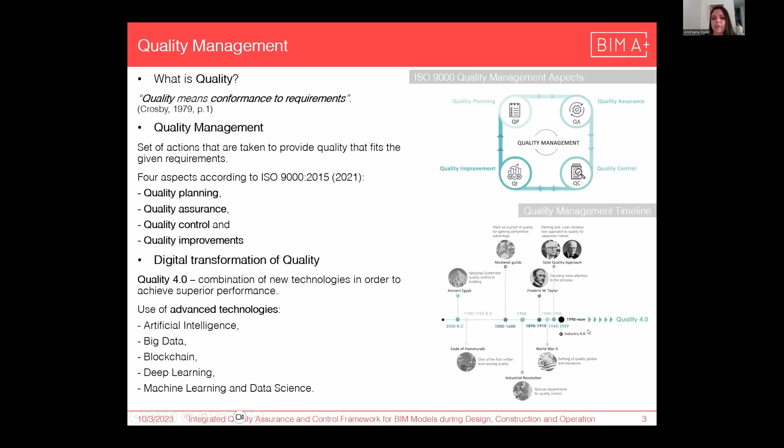Now, to actually delve into the topic of quality assurance and quality control in BIM, it is important to understand what is quality. And the most universal definition would be that quality means conformance to the requirements. Now, the need for quality actually inaugurated the discipline called quality management. The common misconception is that quality management started with the Industrial Revolution. The truth is it actually evolved along with the changes of products and services, which leads us to the main question: how to address quality in the digital environment.

Now, when it comes to quality assurance and quality control in BIM, they're often mistaken for the same. However, they represent two concurrent processes where QA is providing confidence that the quality requirements will be fulfilled, whereas quality control is using different verification methods and focused on fulfilling those requirements.

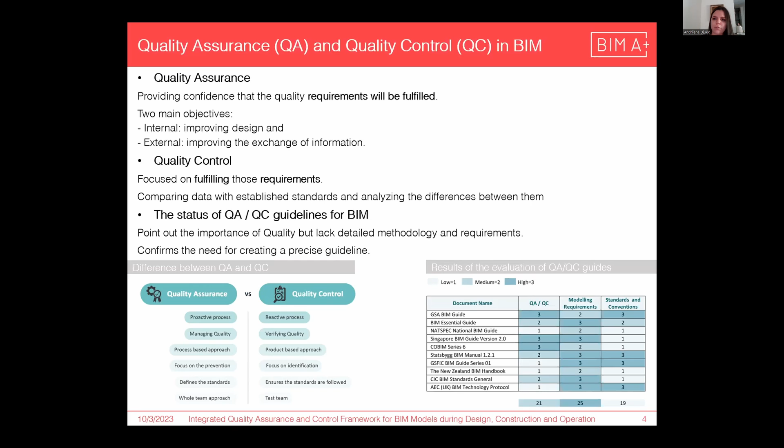Now, to address the current QA/QC status in the BIM market, a research study was conducted, basically by evaluating several guides and manuals, and here we can see the results. The results of this study showed us that all of them address quality to a certain aspect, but they lack detailed and precise guidelines, which also confirms the need for creating thorough requirements for assuring quality of the model.

Now, one very important aspect are information requirements and level of information. For a long time, we had the use of level of detail and level of development, and it caused a lot of misunderstandings. Even now, for each of us, LOD 300 for the BIM would be different. To overcome those limitations, level of information need was introduced.

And level of information need is based on the prerequisites, as we can see in this illustration. So it is important to answer: what is the BIM model use, so why the information is needed? What is the project milestone, so when the information is needed? Who is the actor? And what is the object?

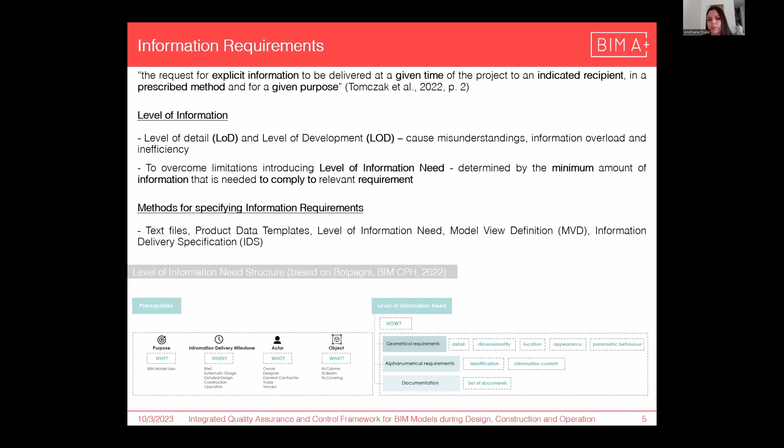Now, when it comes to methods for specifying information requirements, as we can see here, we have more than a few, and they go from the simplest, which is a text file, to something that is now gaining popularity, which is information delivery specification, otherwise known as IDS.

Basically, the proposed methodology integrates quality assurance and quality control: quality assurance through creation of a requirement specificator and quality control through the model verification process. So the proposal is to have a base called requirement specificator, from which the appointing party creates a subset of project-specific requirements. Those requirements are then handed to the appointed party, which creates the model based on them, subsequently exports the IFC file, then returns that IFC file to the appointing party, which then verifies compliance of the IFC file to the requirements.

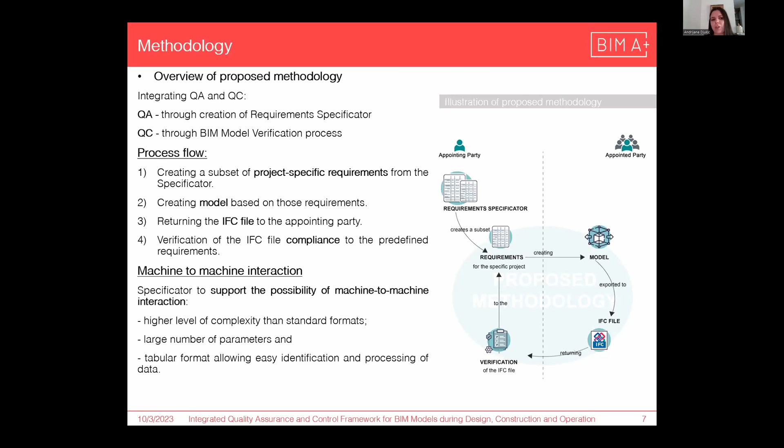An important aspect that was also addressed during the creation was the possibility of machine-to-machine interaction. As we will see later, the requirements specificator has a much higher level of complexity compared to what is conventionally used. It encompasses a large number of parameters, sorted in a tabular format, which would allow advanced tools to process that information. Now, this was tested on a case study in collaboration.

Now, the requirement specificator was a result of extensive research: a lot of interviews conducted with the company, a lot of tools evaluated, as well as guidelines. The specificator follows a class hierarchy inheritance, meaning that lower tiers inherit functionalities from the upper ones. As we can see, it consists of 3 tiers. It goes from the more general, which addresses fundamental requirements important for effective collaboration, so georeferencing, consistency of units, and so on.

Then we go to the second tier, which is more detailed, so it addresses modeling requirements, alphanumerical, geometrical, design specific, and model content, architectural, structural, MEP. And we have a finer division according to project stages. In this case, it was decided to have 3: design, construction, and operation.

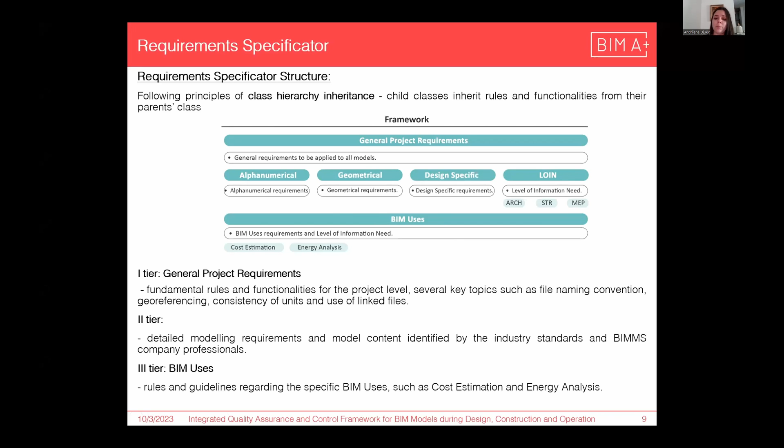And the third tier is structured the same as the second, so it addresses requirements and content, but it is focused on specific BIM uses, in this case, cost estimation and energy analysis. Now here we can see modeling requirements; they all follow the same rule schema.

So shall is expressing a requirement that must be followed, should and may something that is a recommendation, and can something that is a possibility. As we can see in this example, they can be used in a combination to address one requirement.

So here in BIM file naming, we know that all files must follow uniform and consistent naming convention. And then we have an ISO naming standard that the client can choose to follow. And the majority of requirements consist of these guidelines that are either proposed by ISO standards or by company professionals and their experience.

Now, when it comes to model content, it is addressed through level of information need. As already mentioned, it is in tabular configuration. And each parameter consists of description, data type, and corresponding unit.

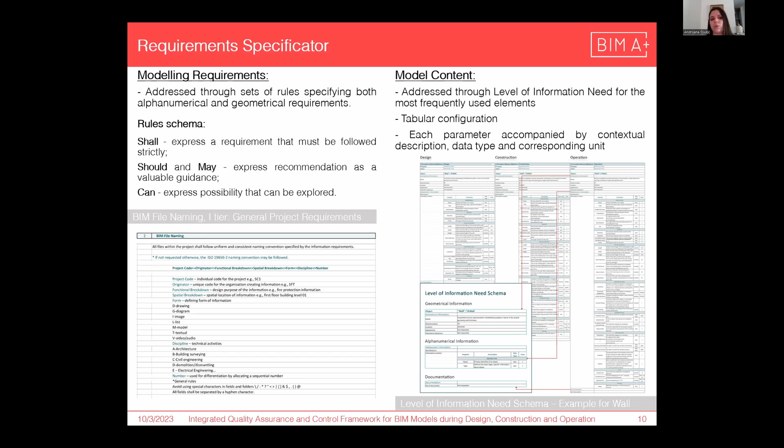Now, in this example of the wall, we can see that quantity of information with each phase grows exponentially. And it is important to know that not only the number of parameters changes, but it also becomes more specific. So if we in design phase have something that is estimated reinforcement, in construction and operation, it will become an actual calculated value.

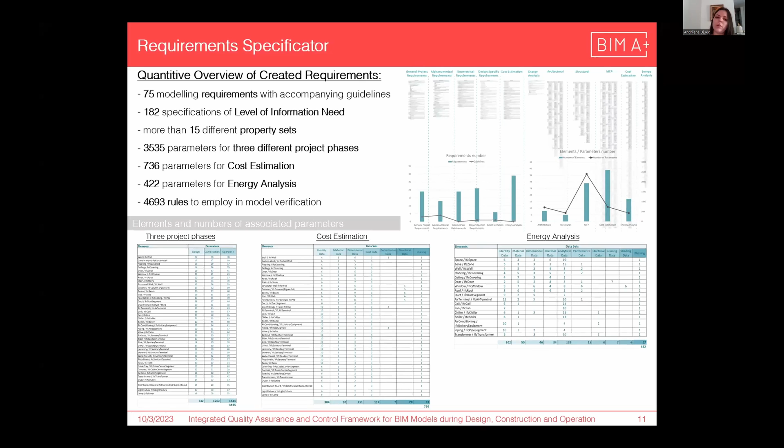And now here we have a quantitative overview of created requirements. Here we can see the requirements and their accompanying guidelines, as well as the elements and accompanying number of parameters. But overall, 75 modeling requirements, 182 level of information need, and overall, at this stage, 4,693 rules that can actually be employed in the verification process.

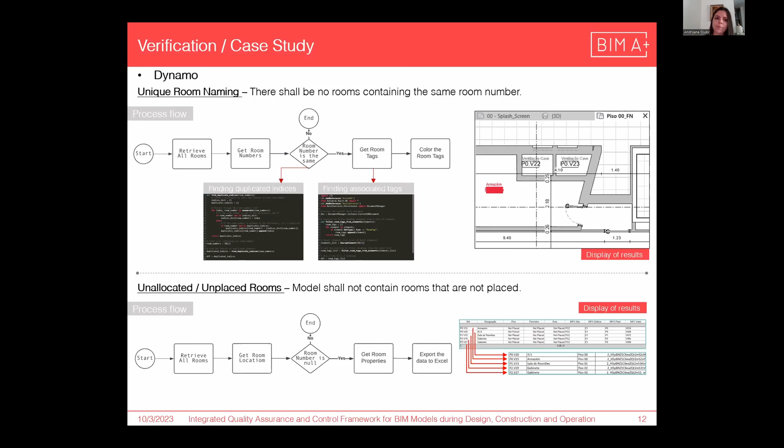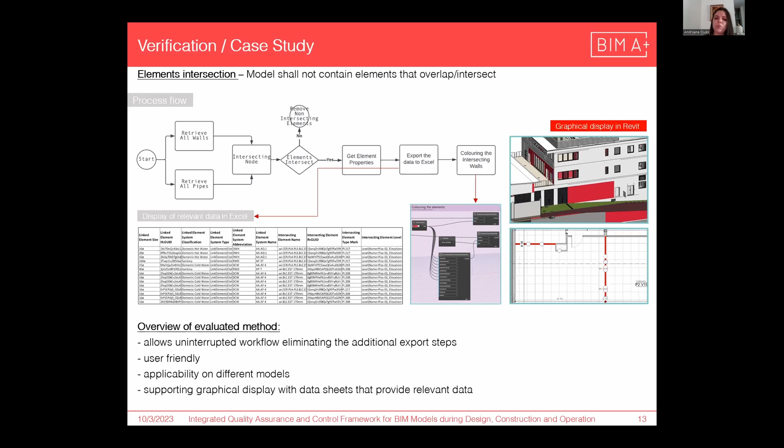And we have the third checking. That was the most complex since it combines the architectural model and the MEP model that is linked. So it uses a package that is specially made for working with linked elements. And this checking actually displays results both in Excel with relevant data and in all Revit views. An important aspect of working with Dynamo for performing these checkings is how to display the results so the users can actually use and process that information.

Now, the second verification method was using Python and IfcOpenShell. Again, 3 checkings, and they were all based on if conditions, meaning they provide pass or fail results. Now, the first one was checking for the minimum handrail height, and it is the most straightforward because it accesses the height that is stored in the property set of these IFC railing objects.

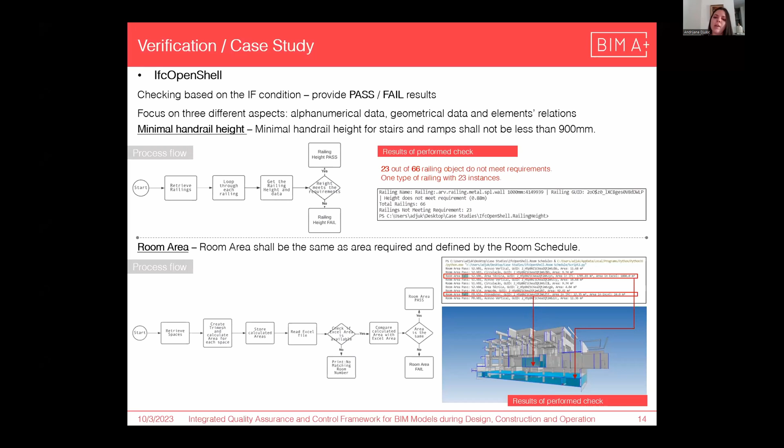The second one is more complex because it employs geometrical calculations. So it does not access the parameter value directly, but it actually employs vertices and faces to create the areas and compare them to the room schedules given by the client.

And we have the third one, which is actually based on elements relationship. So it follows the IFC schema. So basically, first, all wall elements are retrieved. Then following the IFC schema, so going through IfcRelVoids, opening elements, filling elements, we find the windows and doors that are hosted. Then we compare their location and we see if there is a mismatch.

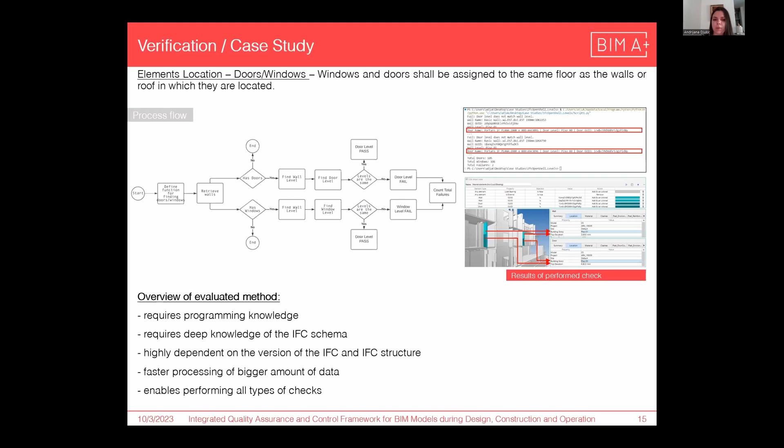And the third verification method was using IDS, and actually 2 approaches were tested. One that is completely open, using IDS converter and IFC tester within BlenderBIM. And the second one, which is editor and validator from ACCA software. Overall, they follow the same principles, with the difference that IDS converter consists of firstly populating an Excel template, then using the converter to convert it to IDS, and then comparing the IFC file to that IDS.

And what is important, the IDS converter shows limitations. It can be used only to specify properties and their values. So no attributes, no classifications, no materials. Basically, no values that are stored in higher entities within IFC schema. Whereas editor allows us all of that, with certain limitations when it comes to the materials.

And here in the visualization of results, we can actually see that both of these approaches showed identical results, with 33 wall instances missing certain dimensional data.

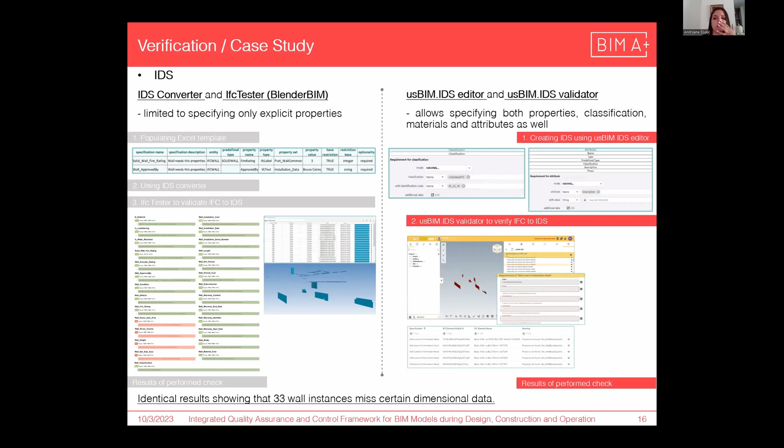Now, when it comes to conclusions of this work, the proposed methodology holds great potential for integrating QA and QC. Though the reality is that its full implementation would require an extensive amount of resources, both financial and human, and Specificator would require constant refinement, aligning it to the current industry standards.

Some of the further development proposals are to enlarge the Specificator by adding more project-specific parameters, more BIM uses, then to enhance verification methodology and actually to incorporate all of the rules, all of the requirements, then to centralize all of them in one web-based platform, and most importantly, to actually facilitate that machine-to-machine interaction.

And to address that, creation of a preparator is suggested. So basically, we would have a preparator where the client would enter only a few input data, such as what is the building type, what is the project milestone, what are the BIM uses. Then automatic generation of those project-specific requirements would happen from the repository based on those several inputs. And then also automatic verification of the IFC file to those requirements.

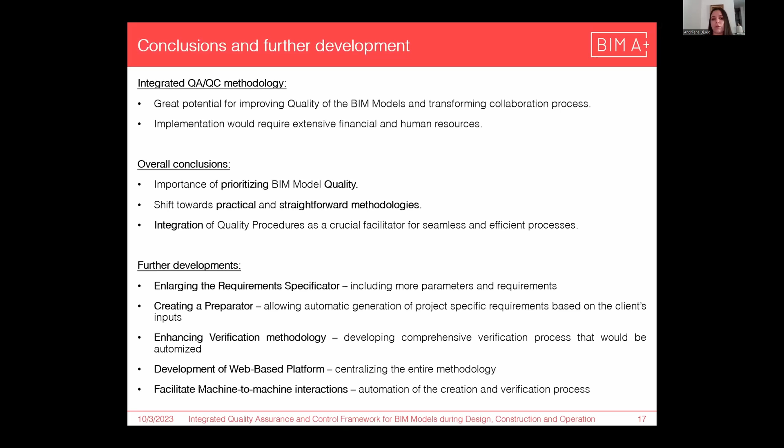But overall, this research underlines the importance of the industry to prioritize BIM model quality and actually to adopt methodologies that are straightforward, that are integrated, and that are applicable in the real world market.